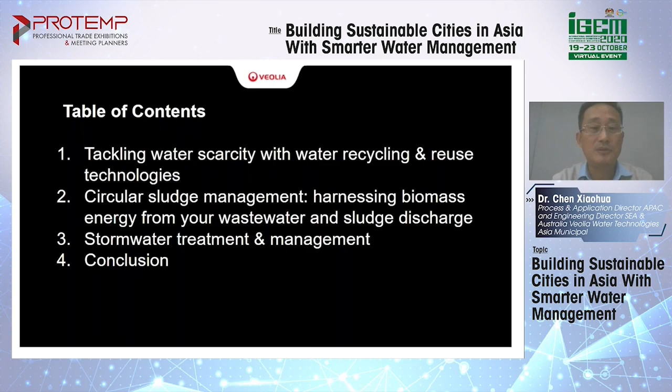And finally, stormwater treatment. As you know, stormwater can make a big disaster for a city, but good management and good treatment of stormwater can be very important. Stormwater also can be considered as a non-conventional water source.

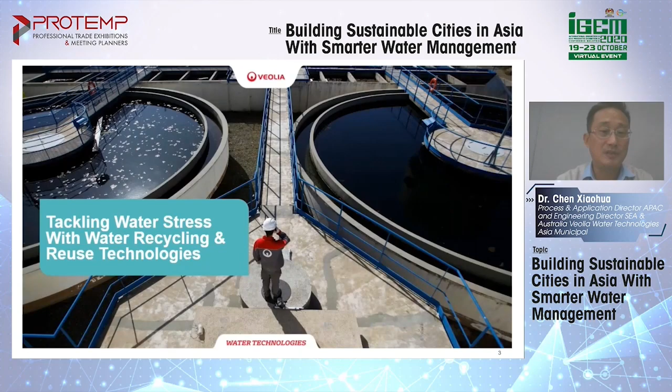Let's start with the first subject, tackling water stress with water recycling and reuse technology. The global water stress situation is the following. There are 17 countries, home to 1/4 of the world's population, that face extremely high levels of water stress. These countries are mostly in India, in the Middle East, for example. In these countries, people withdraw more than 80% of the available supply on average every year.

And then, there are 44 countries home to 1/3 of the world using more than 40% of the available supply.

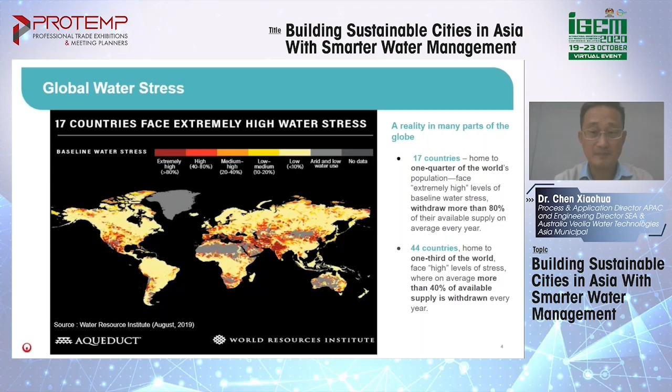So to overcome these circumstances, there are 3 possibilities now. The first is a conventional method, the conservation of water resources. And also, we can use reuse solutions and desalination solutions.

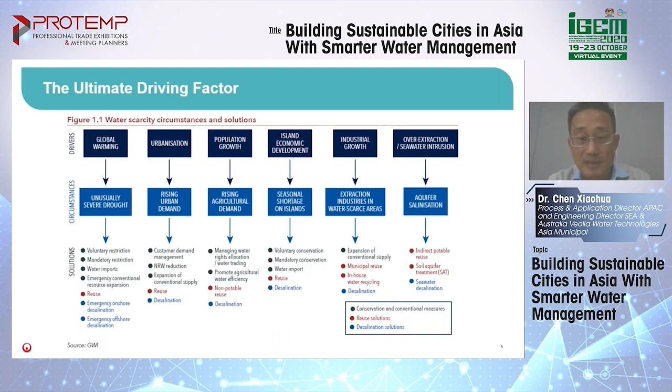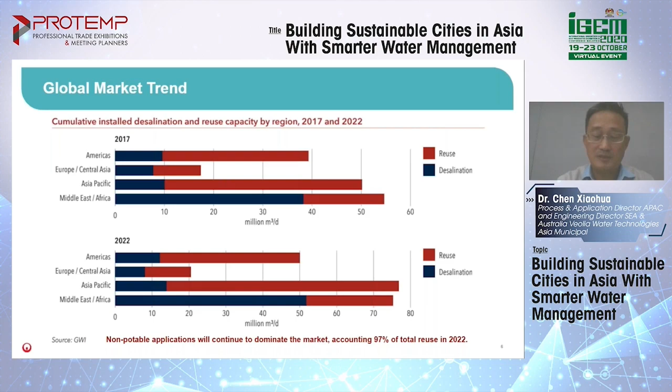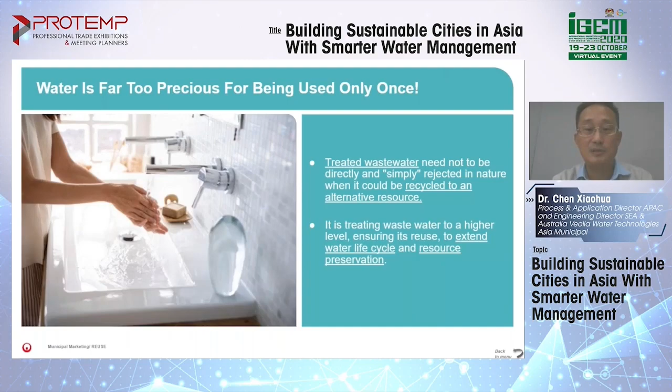Treated wastewater from a wastewater treatment plant is considered a reliable and cheap water source for reuse. Water is far too precious to be used only once. Treated wastewater needn't be directly or simply rejected in nature because it could be recycled as an alternative resource. When we do the alternative water resource treatment, it can meet the target, and in this way we can extend the water life cycle and resource preservation.

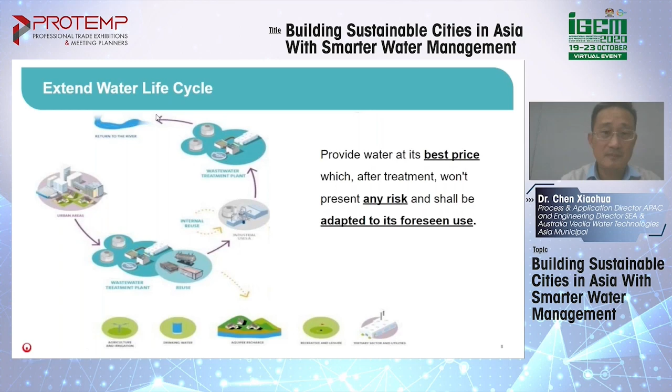We can also move forward and create multiple loops of water recycling and reuse. Reused water is water used more than once for multiple purposes. In this way, we can have water reuse optimized.

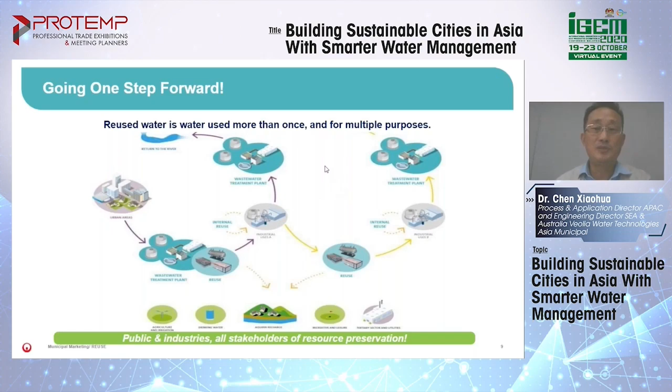Reused water can be applied in different fields, such as urban reuse, including recreational field irrigation, golf irrigation, landscape irrigation, firefighting, toilet flushing, cooling towers, district cooling towers, and water fountains. In agricultural reuse, it can irrigate food crops, food processing, non-food processing irrigation, and livestock watering. In environmental reuse, it can be used for wetlands, aquatic habitats, river and lake flow augmentation, groundwater recharge, sea barrier, impoundment, snowmaking, fishing, boating, and swimming.

Potable reuse can be used for direct potable reuse. Today, the water treatment process is so sophisticated that we can convert wastewater directly to potable water. We have a case study in Africa. Indirect potable use is also widely used; for example, in Singapore, part of NEWater is reused as indirect potable use.

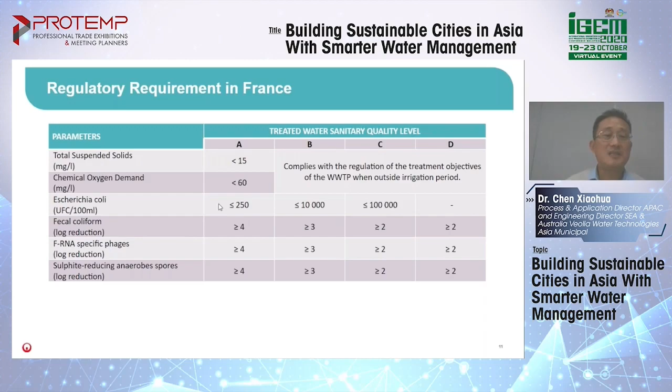So the parameters include pH, BOD as an indicator of organic carbon pollution, suspended solids represented by TSS and turbidity, and bacteria concentration. Finally, we need to do disinfection, so there's the residual chlorine concentration.

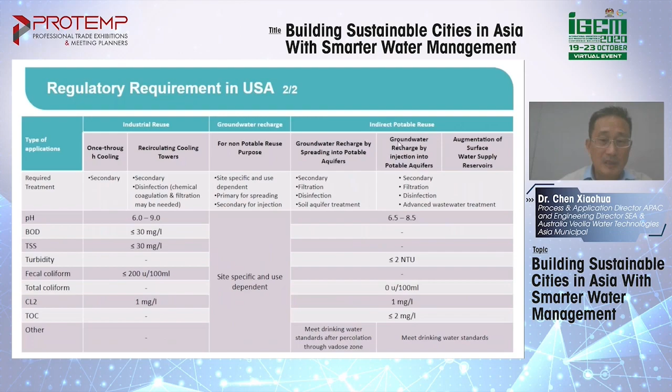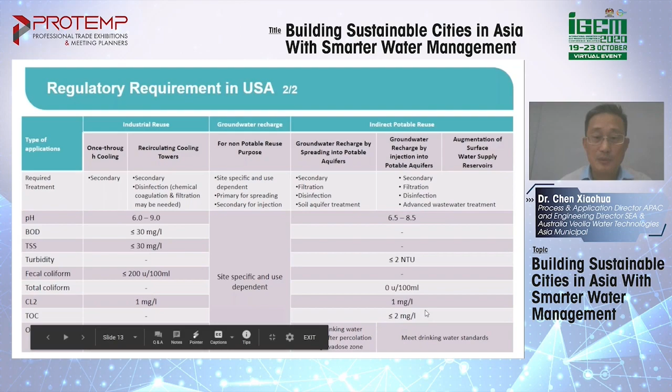And finally, for indirect potable reuse, there's one more parameter called TOC, total organic carbon, which is the indication of organic carbon pollution level in the treated water.

And this is a grey water standard in Singapore. So the parameters are nearly the same: pH, color, odor, residual chlorine is required.

And turbidity is the suspended solid indication, BOD as organic carbon pollution, and total carbon, total coliform bacteria, E. coli as bacteria parameters. And if it is used in cooling water, we have added a total Legionella count concentration.

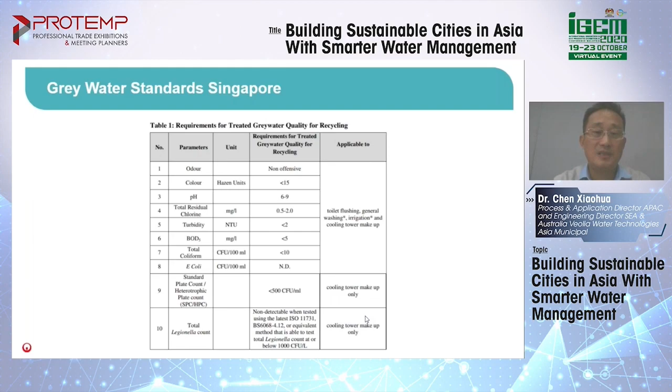So this standard is widely used in Southeast Asian countries when we have a project reuse water project.

So available technology in the market falls into 2 categories and 3 solution packages. Talking about the two categories, the first one is desalination technology, the second one is reuse technology.

So in desalination technology, there is thermal technology, an evaporation technology called MSF, MED, or vapor compression evaporator. These technologies are widely used in the Middle East for seawater desalination.

Other desalination technologies for pollution such as ion exchanger, electrodialysis, and EDI, electrodeionization. And reverse osmosis belongs both to desalination technology and reuse technology.

So within reuse technology, we can easily think about biological treatment. All biological treatments together, such as activated sludge, SBR, MBR, trickling filter, biological contactor, moving bed biological reactor. So moving bed bioreactor is called MBBR.

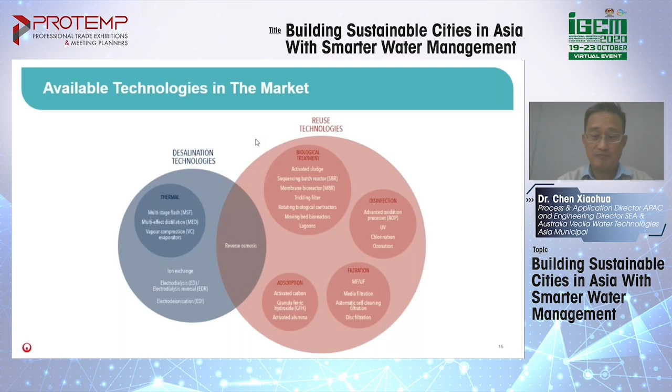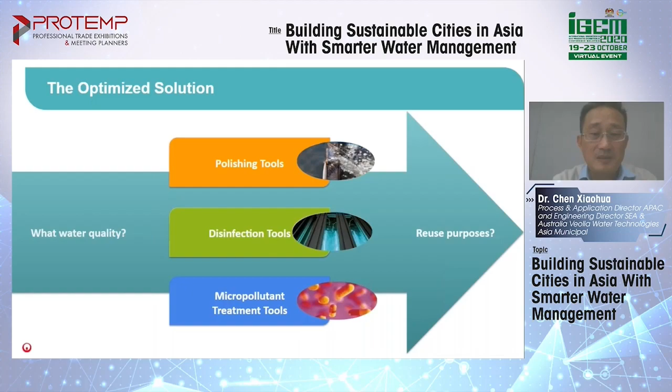Then there are 3 solution packages according to the raw water quality we receive and the final purpose for reuse. We can propose three packages: the first is polishing tools, the second is disinfection tools, and the third is micropollutant treatment tools.

As a reminder, secondary treatment is mostly biological treatment. It can also be clarifiers like lamellar clarifier, ballasted flocculation clarifier, and also a series of BAF, biologically aerated filter, in addition to the conventional filter.

And as the first barrier, you can have filtration technology: microfiltration, ultrafiltration, and disc filter.

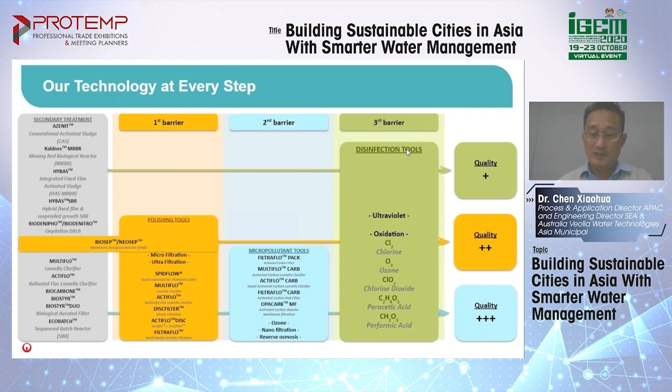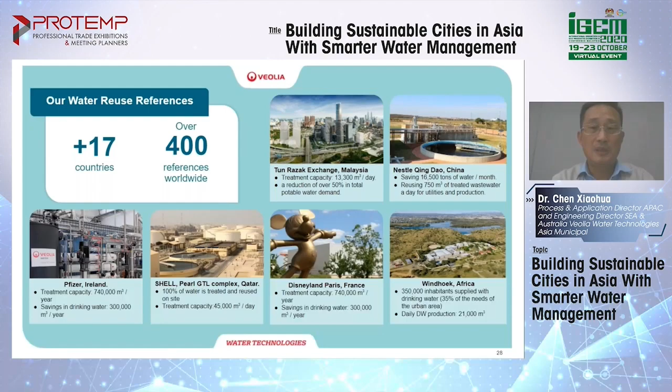So Veolia has more than 400 references spread across 17 countries worldwide. The references are located in Southeast Asia, for example, the TRX project in Malaysia, in China, in Ireland, in Qatar, in Disneyland Paris, and Namibia, Africa. I would particularly mention two case studies in Southeast Asia.

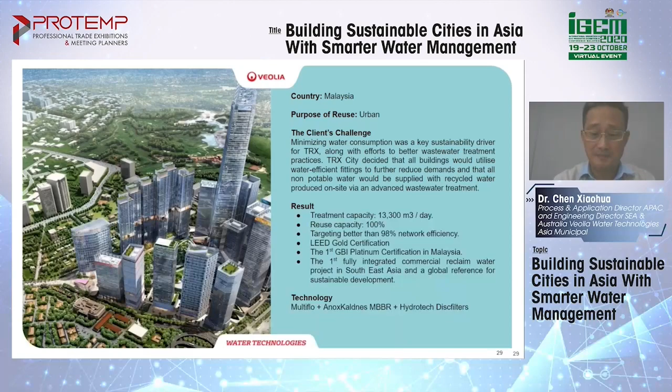So the first one is TRX, located in Kuala Lumpur City. The full name is Tun Razak Exchange. The objective and the challenge is minimizing water consumption.

This is a KPI as a sustainability driver. So along with the effort to improve wastewater treatment practices, TRX City decided that all buildings would use water efficiency fittings to further reduce demand, and all non-potable water could be supplied with recycled water. So the recycle reuse capacity is 100%, and the treatment capacity is 13,300 cubic meters per day.

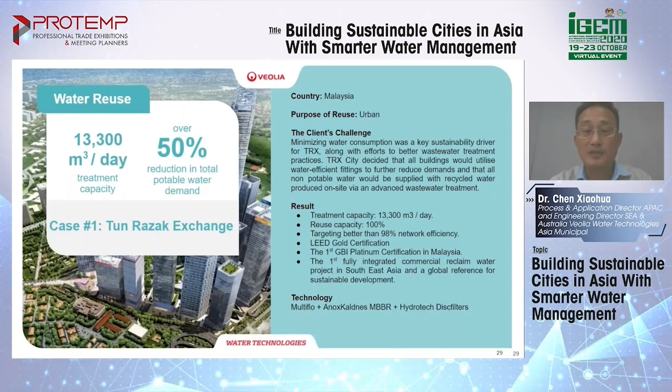Targeting better than 98% network efficiency, it has LEED Green Building Gold certification, and is the first GBI Platinum certification in Malaysia, and the first fully integrated commercial reclaim water project in Southeast Asia, and a global reference for sustainable development.

So looking more into the detail, the process line is based on conventional water treatment, but using a compact solution. The biological treatment part is called moving bed bioreactor, in combination with the lamellar primary settler. And MBBR process, the footprint is 5 times smaller compared to conventional activated sludge.

The blue parts are treatment steps for the tertiary treatment, aiming to get the reused water quality. So these are disc filter for the separation of sludge with treated water, dual media filter to further remove the suspended solids, and two-stage disinfection to meet the bacteriological criteria, and the treated water is 100% recycled. As for the sludge treatment line, it is gravity thickener, sludge dewatering, and dewatered sludge moves to the landfill.

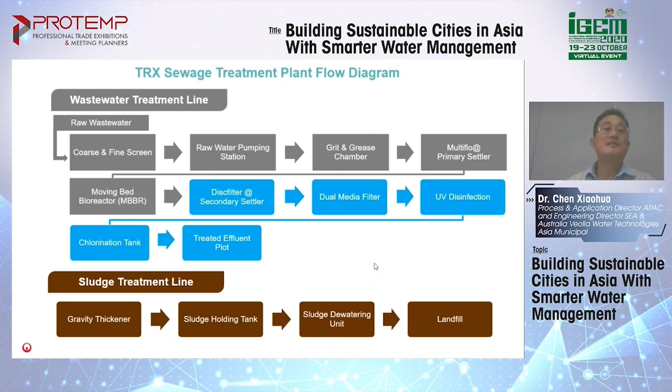Treated water standard is mainly based on the Singapore gray water standard, but the standard is more stringent because we introduced ammonia nitrogen less than 2 milligrams per liter, nitrate lower than 10 milligrams per liter. Because of the constraint on nitrogen removal, we have intensive biological treatment using the MBBR process, and the rest of the parameters comply with gray water quality.

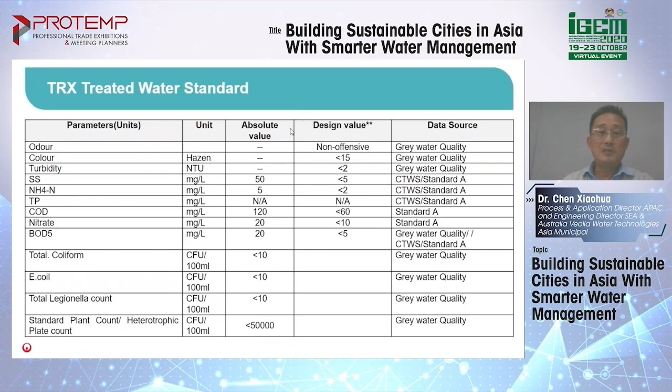So this project TRX is under commissioning. The second case study is located in Bangkok, Thailand. It's a project similar to TRX, but with smaller capacity, 10,000 cubic meters per day.

The difference with TRX is that, in addition, we do 100% water reuse. We have also a rainwater harvesting facility, so rainwater is harvested to increase the recycled water capacity. This is the first LEED neighborhood development platinum certificate in Thailand.

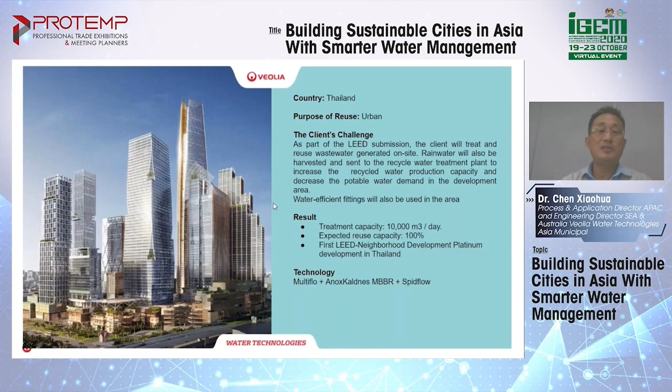Going more into detail into the treatment process, the gray part is the conventional treatment process. Also, we use the lamellar primary settler followed by the MBBR process. As I mentioned, this offers 5 times smaller footprint, because this treatment plant is fully underground.

Fully underground, constructed in 3 levels, -3, -2, -1. So we need a very, very extremely compact technology. Here we use dissolved air flotation as a separation process for treated water and suspended solids. And then after that is dual media filter polishing and 2-stage disinfection with chlorine disinfection, UV disinfection, chlorine disinfection.

The effluent is recycled, including toilet flushing and district cooling tower recycling makeup water. The sludge treatment line is quite simple, the same sludge dewatering, and it goes to landfill.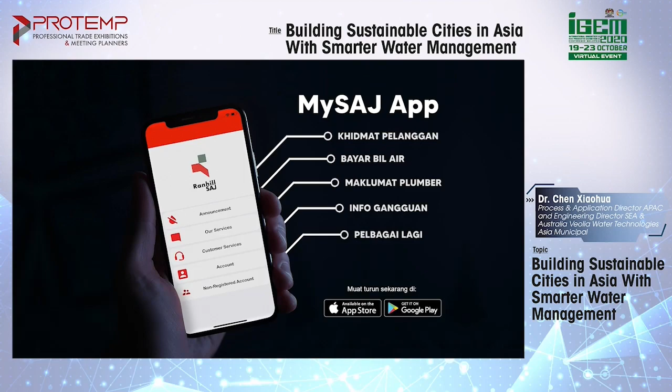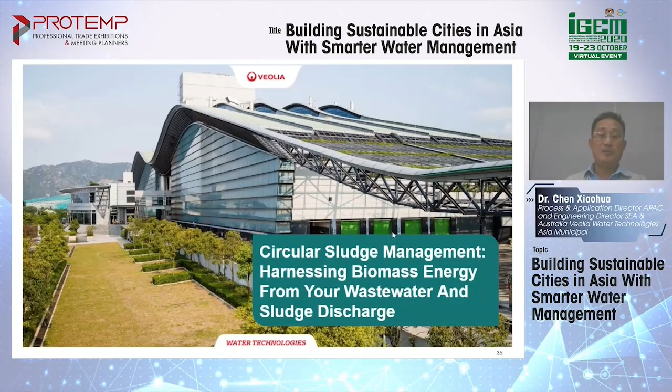So moving forward to the second topic, sludge treatment, circular sludge management, harnessing biomass energy from your wastewater and sludge discharge.

Let us remind together the progression of sludge management. Around 1970, we were satisfied with sludge direct disposal to landfill. From 1990, we started to use sludge as fertilizer, spreading it to the field and to the landscape, without very stringent regulation.

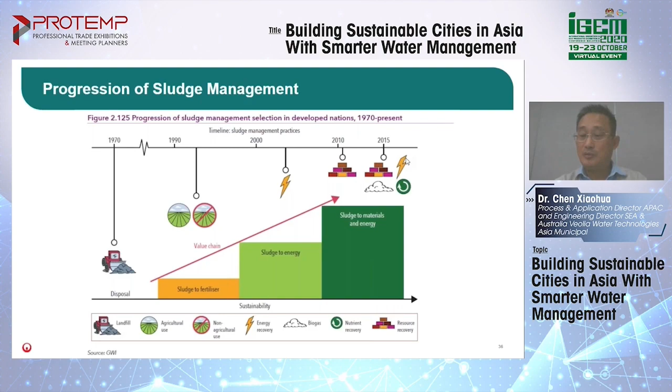From the year 2000, we started to do sludge to energy, producing biogas and sludge to make green energy recovery and also heat recovery. From 2010, 2015, and to nowadays, we started to do intensive green energy recovery, and also material and resource recovery. So this is where we are today — we do a lot of things with sludge.

For the sludge treatment roadmap, digestion is at the heart of the process. The digestion can have a pre-treatment upstream of the digester, a process called thermal hydrolysis, or THP. So I will take this opportunity to present THP in more detail.

But coming back to the roadmap, the sludge digestion system will receive sludge generated from the wastewater treatment plant, and some sludge is suitable to recover plastics, called bioplastics. While receiving sludge from the wastewater treatment plant, we can also receive bio waste, municipal solid waste, and industrial food processing solid waste. When we combine two types of sludge together, it is called co-digestion.

Co-digestion will greatly improve biogas production. So what we do is produce the biogas. First, we send the biogas to the cogenerators, the CHP system. The cogenerator will produce electricity, which can be sold to the electricity grid.

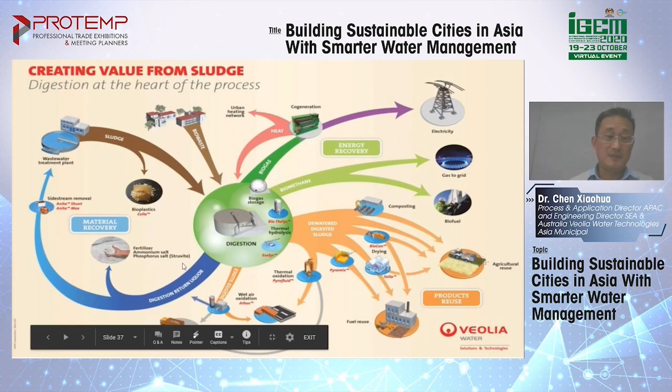Finally, sludge digestion after dewatering generates liquid, called the supernatant. It's very rich in ammonia, so we can also recover and produce a fertilizer called struvite. Struvite is a very good fertilizer for agriculture.

Now let's move on to the thermal hydrolysis process. It looks as shown in the photo - quite complicated, but it's actually very easy. Just think about a pressure cooker in your kitchen. Sludge is put in at high temperature, as high as 165 degrees, with a retention time of 30 minutes, slightly longer than when you cook meat, and pressure of 7 bar, slightly higher than a kitchen pressure cooker.

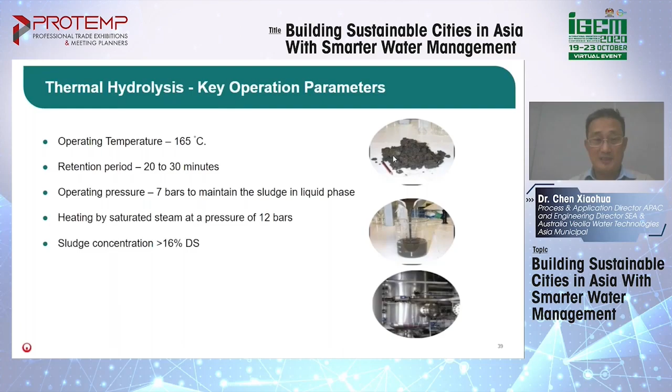After this treatment, the sludge characteristics change. Sludge has lower viscosity, meaning it can be fed at a higher solid concentration, 2 times higher, for the downstream digester. Also, when the sludge is cooked, there's improvement in sludge biodegradability, so you get higher biogas production.

You also have hygienization of the sludge because it's treated at high temperature, 165 degrees, giving you 6 log pathogen removal. Finally, you have better dewatering properties - you get higher dryness, so sludge volume is finally reduced.

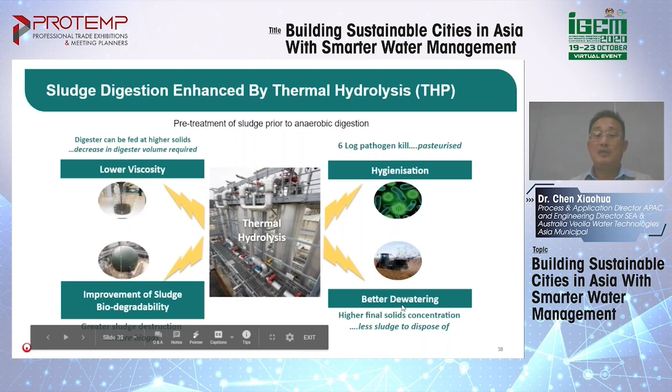So let us summarize: THP combined with a downstream digester gives you some advantages. Sludge is fed at much higher concentration, 2 times higher, and retention time is reduced. That means you can design the downstream digester 2.5 times smaller, so digester design is very cheap. And the fed sludge is very hot, so you don't need to heat the digester.

It operates at 38 degrees instead of 35 degrees, and you get 20 to 30% more biogas produced. So more biogas produced means more energy recovered, giving you lower capex for digester construction.

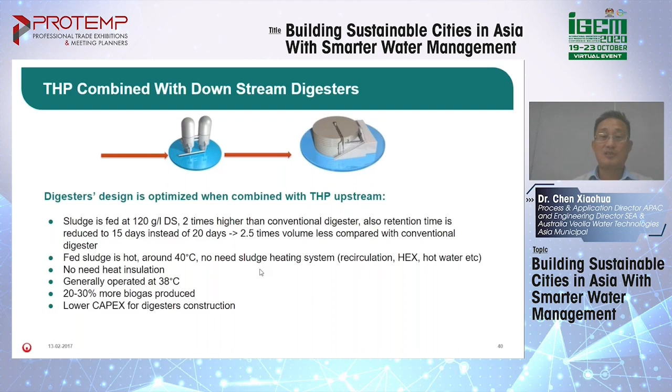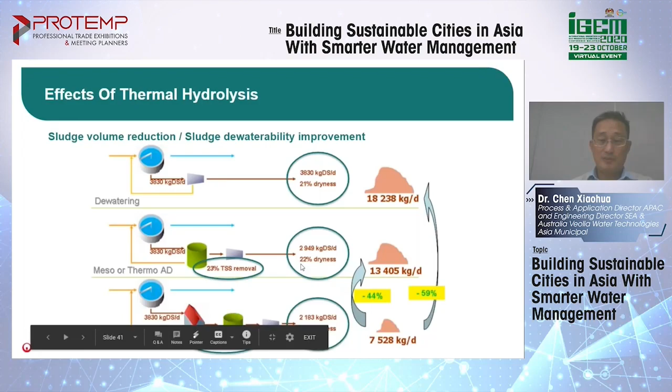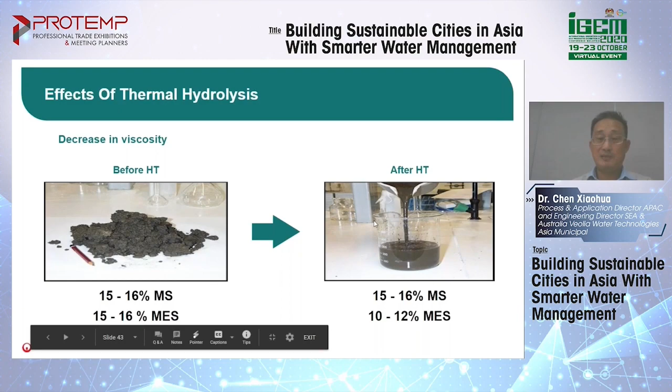This slide shows you have cell lysis, making the biomass more soluble and more biodegradable. This slide shows with the same dry solids of 15 to 16%, one is a solid pasty state, another is very liquid state - proving we can feed the digester at 2 times higher concentration.

So in the market, Veolia can propose 2 types of standard packaged products. The first one is called Biothelys, a batch reactor. The second is Exelys, a continuous reactor. Biothelys is suitable for meeting larger capacity needs.

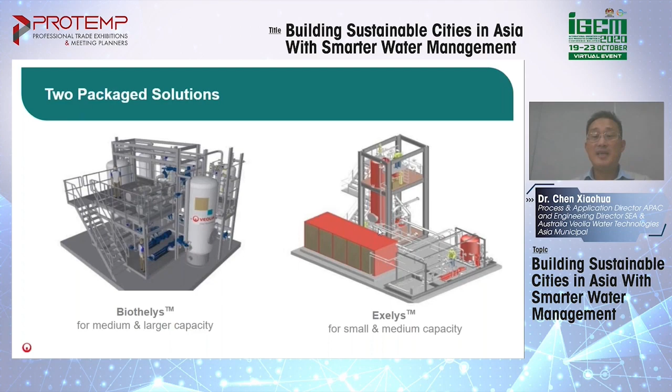Here I would like to mention 2 case studies. One is with Exelys continuous thermal hydrolysis in Billund City, Denmark. When you visit this biorefinery plant in Billund, don't forget to drop by Legoland - here you have the original Legoland, and today also Johor Bahru Legoland. Legoland is also interesting in addition to the Exelys plant visit.

After construction and integration of the Exelys system, we have biomass treated plus 110% more, biogas output 130% more, and 10% more organic fertilizer. Power generation is multiplied by 2.5, from 2.7 gigawatt hours to 6.8 gigawatt hours.

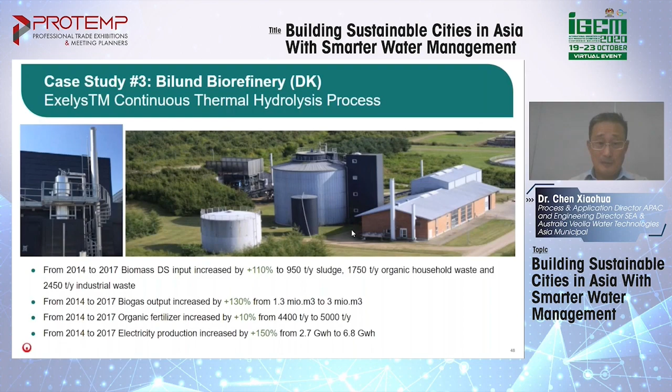The second case study uses our batch reactor, the Biothelys reactor. The plant is much bigger in scale. I participated in the construction design of this plant when I was working at Veolia headquarters, something like more than 20 years ago. This plant started more than 20 years ago.

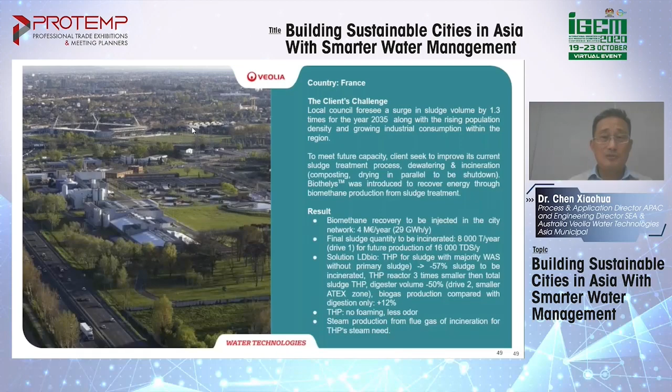The city is called Toulouse, and the wastewater treatment plant is called Ginestous 2. Toulouse is the headquarters of Airbus - the city manufactures Airbus planes. This is the fourth largest plant in France.

The interesting thing is that with forecast sludge volume increasing by 1.3 times, while sludge incineration capacity cannot be increased beyond 8,000 tons per year, the client needed to review the existing sludge incineration facility. Today's situation is dewatering plus direct incineration.

The final choice is that thermal hydrolysis with Biothelys is introduced upstream of the sludge incineration. This achieves an enormous 57% sludge volume reduction, meeting the 8,000 tons per year incineration limit. The facility is currently under construction.

Another showcase is that produced biogas is purified by our internal biogas purification process. So all the purified biogas is injected into the natural gas grid, and of course we sell it at 2 times the price. So the economy, the saving generated, the revenue generated is 4 million euro per year, equivalent to 29 gigawatt hours per year.

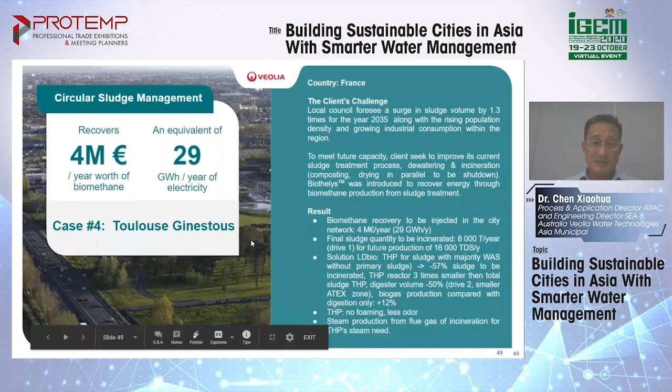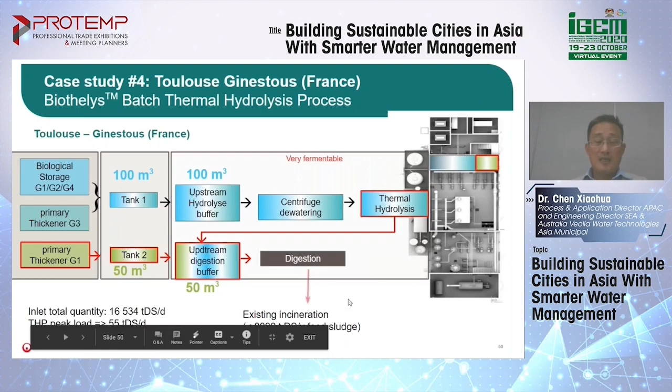So here is the diagram. Thermal hydrolysis goes mainly to biological waste sludge. Thermal hydrolysis is then mixed with primary sludge, G1 going to digestion, and then going to existing incineration.

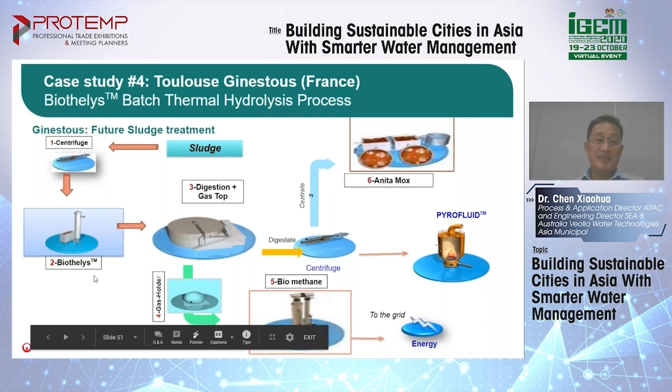So here is the diagram showing the most important thing here, which is digestion. Produced biogas is purified, producing biomethane, and then digested sludge, digested liquid supernatant goes to the Anammox process, our in-house process called AnitaMox. And then during incineration, there is not only ultimate sludge volume reduction, but also energy recovery in the form of steam necessary for the THP thermal hydrolysis requirement.

So going to the final subject, stormwater treatment and management. The photo shown behind is a stormwater treatment facility at the biggest wastewater treatment plant in Paris. The plant is called Acheres Wastewater Treatment Plant. The treatment capacity is 30 cubic meters per second, equivalent to 2,600 MLD capacity. This plant is placed during dry weather in series with the existing biological treatment plant.

While during storm events, it is put in parallel, because during the storm event we receive 2 times more flow, and the additional flow cannot be treated by the biological process.

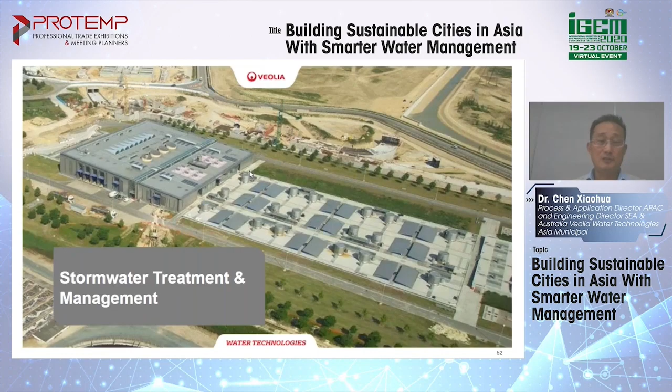So what are the characteristics of stormwater? Stormwater arrivals are uncontrolled, you cannot easily forecast them, and there is big variation in hydraulic and pollution load, located in urban areas. So urban areas have a land footprint issue. Our solution is proposing our Actiflo process.

This process is called sand-ballasted high-rate clarification technology. Actiflo can be placed individually together with a stormwater storage tank, and also can be placed within a wastewater treatment plant.

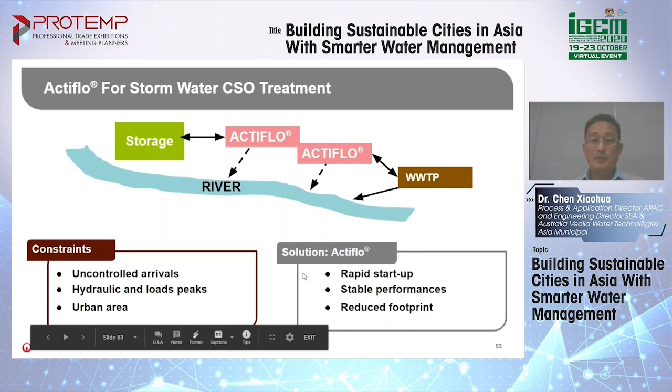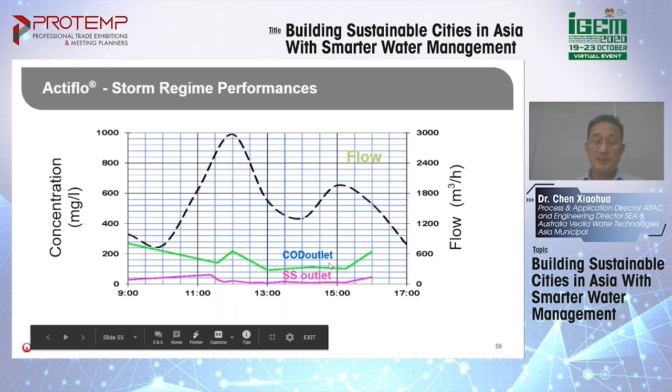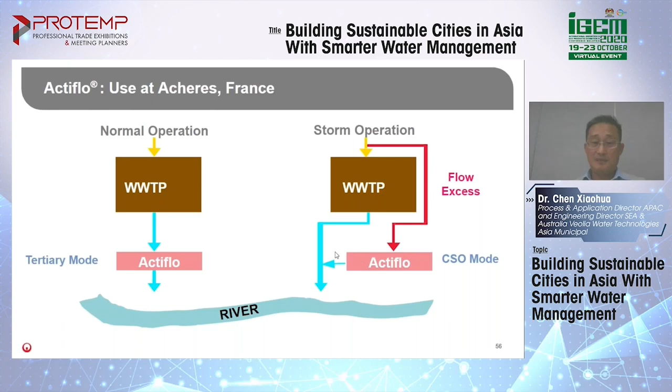This curve shows the pollution and flow with big variation, while the treated water performance remains stable. As I mentioned, when Actiflo is placed in a wastewater treatment plant, it can be used in tertiary mode during the dry season, and in parallel for combined sewer overflow (CSO). In parallel mode, the mixed flow treated is discharged to the river.

So here I would like to mention a case study located in the city of Lille. Lille is the largest city in North France. The treatment plant is called Marquette Les Lille, the biggest plant in the city of Lille.

This treatment plant's water treatment line adopted a very sophisticated treatment line, the MBBR process, combined with activated sludge. We call it IFAS in the market. We put the media in the activated sludge, offering 2.5 times smaller footprint.

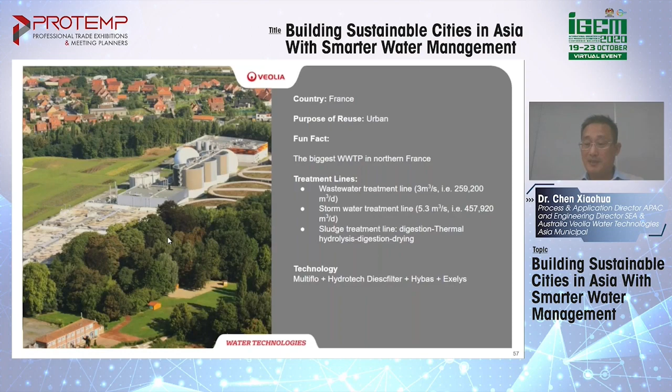And also in sludge treatment we introduced the thermal hydrolysis process, the Exelys continuous process. This water treatment plant is equipped with a stormwater treatment facility. The treatment capacity is 700,000 cubic meters per day, equivalent to 620,000 population equivalent.

The water treatment line has a capacity of 259,200 cubic meters a day, while the stormwater treatment line is 457,000 cubic meters per day. Sludge treatment adopted digestion with thermal hydrolysis digestion.

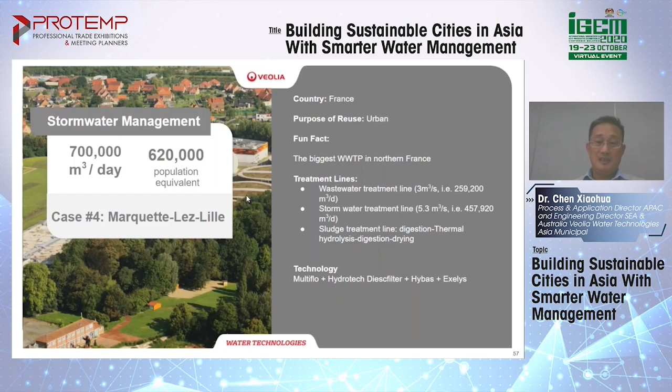So this wastewater treatment plant is a real example of a plant for the city of the future. If you have the opportunity, it's very nice to visit this plant for the city of future.

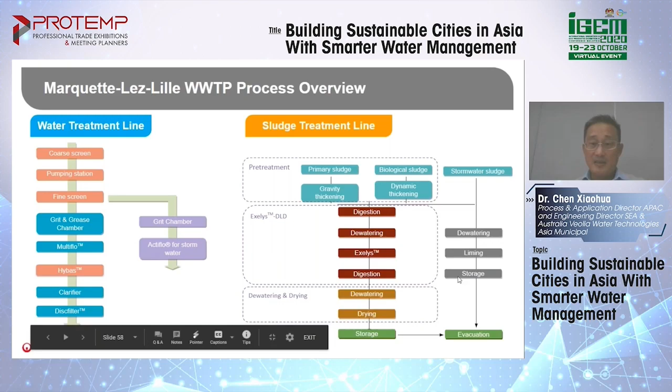The treatment line, as I mentioned, has a water treatment line based on the MBBR primary treatment process. The extra flow, which cannot be accepted by the treatment plant, is diverted to our stormwater treatment facility, which has 3 Actiflo facilities. For the sludge treatment, there is Exelys thermal hydrolysis and digestion, and also sludge drying.

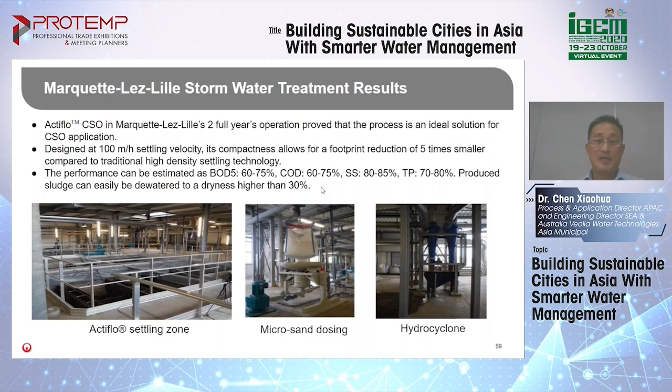So produced sludge can be introduced either to the thermal hydrolysis digestion system, or can be dewatered directly. But this primary sludge offers higher dewaterability, with 30% dryness.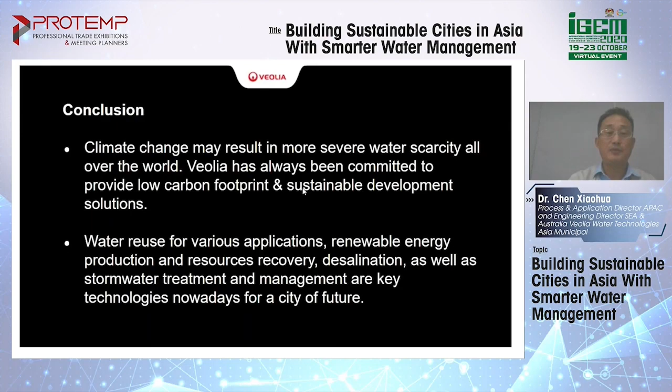Finally, as a conclusion, climate change may result in more severe water scarcity all over the world. Veolia has always been committed to providing low carbon footprint and sustainable development solutions. Veolia is committed to resourcing the world. Water reuse for various applications, renewable energy production with resource recovery, desalination, as well as stormwater treatment and management, are key technologies nowadays for a city of the future. Thank you very much for your attention.